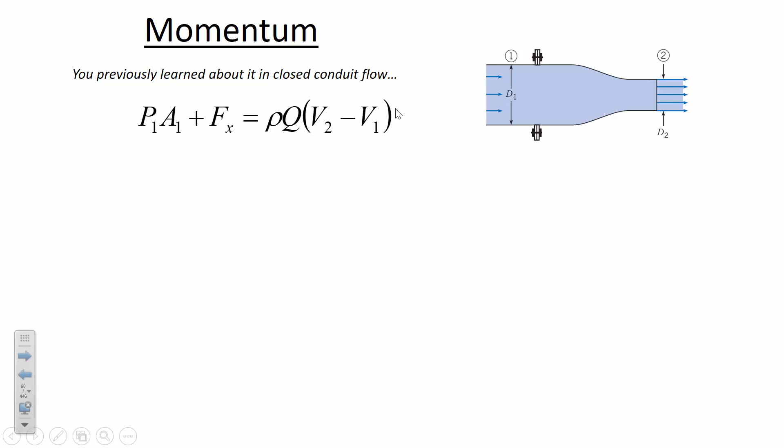So this is the momentum equation you've already used in the past, but momentum principles can also apply in open channel flow. We apply them when there's a hydraulic jump, because although we can use energy principles to predict a difference in depth when there are relatively gradual transitions, like flow over a step or flow when the channel gets narrower or wider, we can use energy for that.

We can't use energy principles to predict the downstream depth in a hydraulic jump because, as you'll see, there's so much energy loss in the hydraulic jump. So we have to have some other way of approaching things.

So this is the momentum function. What it's saying is that when you compare an upstream and a downstream location where the depth is changing, even when the energy isn't conserved, the momentum is conserved. The momentum function says there is both a dynamic component and a hydrostatic component to what's being conserved.

At location 1, if you take the flow rate through this channel and the gravitational acceleration constant, the cross-sectional area - this first term, if multiplied by gamma, would give you a force, as would the depth to the centroid. That's the distance from the top of the water down to the centroid, multiplied by the cross-sectional area. So if you take this second term of the momentum function and multiply it by the unit weight, that gives you the hydrostatic force component at 1.

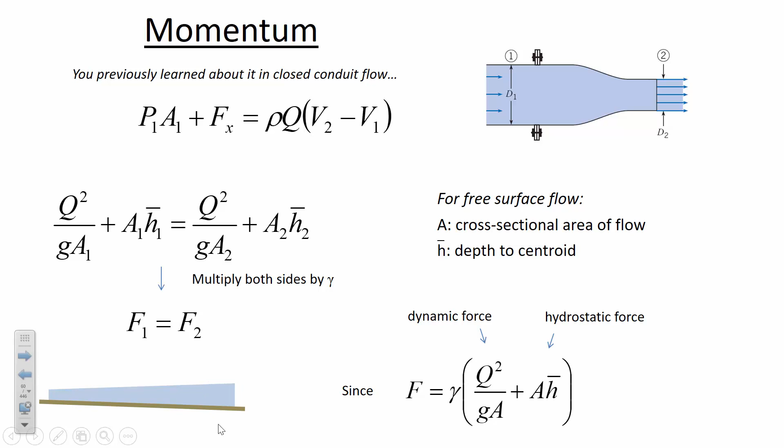By the way, calculating the depth to the centroid, if it's a rectangular channel, it's only half the distance down. But we'll go through an example where we calculate the depth to the centroid for a trapezoidal channel, because it's a little bit different. So momentum is just a law of conservation that we're going to use to predict what would be the depth downstream when there is a pretty radical transition in the flow regime.

That radical transition is called rapidly varying flow. I'm going to show you a couple of instances that will cause a rapid variation in flow, and what's varying is the flow depth and also the flow regime.

Upstream of this transition, conditions are supercritical, so the depth is less than the critical depth before the transition. This diagram shows that the slope before the change was greater than the critical slope, and because it was really steep, that caused supercritical flow - the depth y naught 1 was less than the critical depth. But then the slope got less steep, and after this transition, the slope is less than critical, so we call that a mild slope.

Any slope that's going to cause subcritical flow is a mild slope, so the mild slope causes the depth to be greater than the critical depth. This dashed line represents the critical depth, and since it's greater than the critical depth, that means it's going to be subcritical flow.

Anytime you have a transition between supercritical and subcritical flow, going from super to sub, it can't do it gradually - it has to be a really dynamic, rapid change in the depth. That's what a hydraulic jump is. Here they're trying to depict the rollers and the foam and the vigorous turbulent mixing you'd see in an actual hydraulic jump. So a change in slope is something that can cause rapidly varying flow.

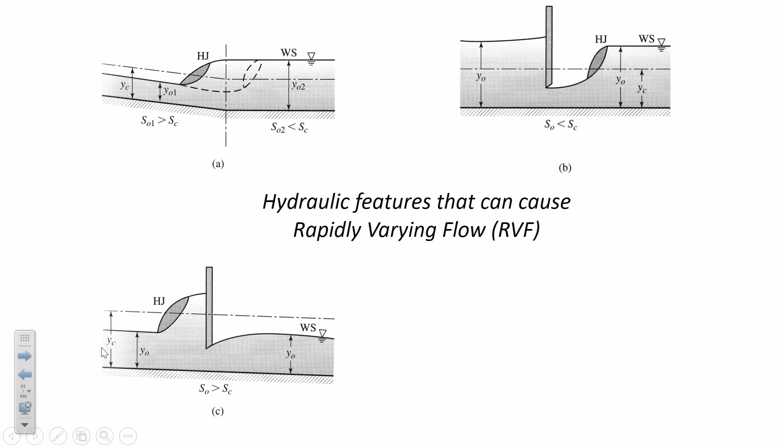It's not downstream of the gate that you see the jump, but upstream of the gate that you see the jump. The reason is that when this gate was lowered into place, it caused pooling on the upstream side of the gate, and the water pooled above the critical depth. So further upstream, where we had supercritical flow conditions, the supercritical flow is coming along, and suddenly there's a downstream depth that's greater than the critical depth. So you have super going to subcritical, and anytime you have that transition, it has to go through a hydraulic jump to match the two.

RVF stands for rapidly varying flow. What do you think GVF stands for? Gradually, right. So rapidly varying flow is the hydraulic jump itself.

It's this dark gray shaded area where the depth is quickly transitioning from supercritical to subcritical. That's rapid. Gradually varying flow is just what it sounds like - it's where the depth is changing much more slowly. Instead of, like a hydraulic jump which may have a length of a couple of meters, gradually varying flow may have a length of several thousand meters, potentially.

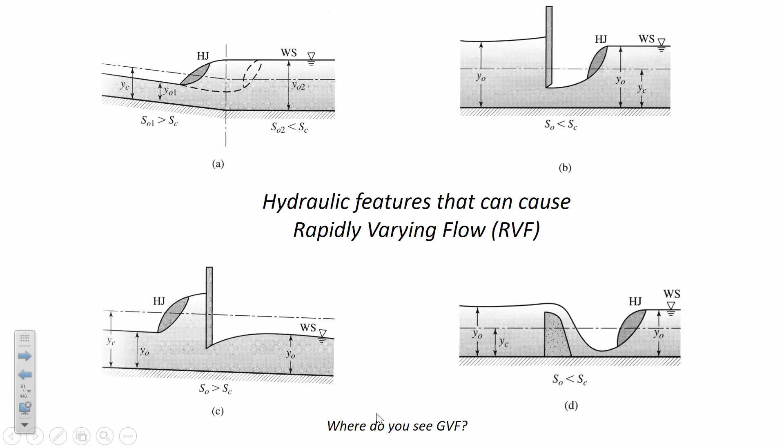Remember, energy isn't conserved, but momentum is. Now this may look like a specific energy diagram, but it's not. It's just coincidental that it has that same curved shape. There are differences we'll take a look at.

On the horizontal axis is the momentum function. On the vertical axis is the depth.

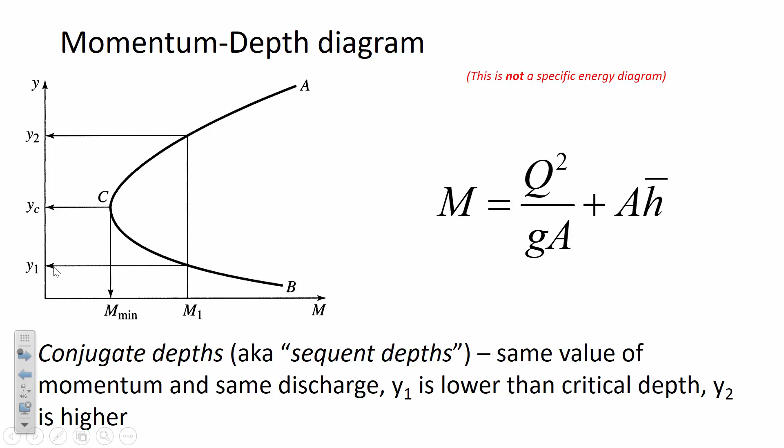So the way to use this diagram once you create it: you'll have some known depth before the hydraulic jump, a known depth y1. If you go over to the momentum depth diagram and then up to the same depth that has the same amount of momentum, you can go over and find y2, the depth after the hydraulic jump. So you'll have the same momentum, the same flow rate, but two different depths with the same amount of momentum.

Just to illustrate the difference between a specific energy diagram and a momentum depth diagram, I'm going to create one in Excel. If you've got your computer, you're free to follow along, but you don't necessarily have to, because you're going to get this same experience for the homework assignment. It asks you to create a momentum depth diagram, so I'm going to show you how to do that.

What we're going to do is just take this given information. We're going to know the width of the channel, the amount of flow rate going through there, and various depths. So there's the flow rate in cubic meters per second, the width of the channel in meters, and we're going to have a whole lot of various depths.

H bar is the depth to the centroid, the distance from the top of the water to the center of area. The cross-sectional area is in meters squared, the velocity of the water as it flows, specific energy—just to illustrate the difference between the specific energy diagram and momentum depth diagram—and then the amount of momentum. The units on the momentum function are meters cubed.

Oh, that somehow got formatted along with the rest of it. Let me fix that... well, we'll fix that in a bit.

In the problem, it says the flow rate is 15 cubic meters per second. I'm going to make a bunch of these because I'm going to look at all the various combinations of depth that could give that same 15 cubic meters per second. So for 15 cubic meters per second, the channel width is always going to be 6.5 meters. That doesn't change, but what does change is we can have lots of different depths and corresponding velocities.

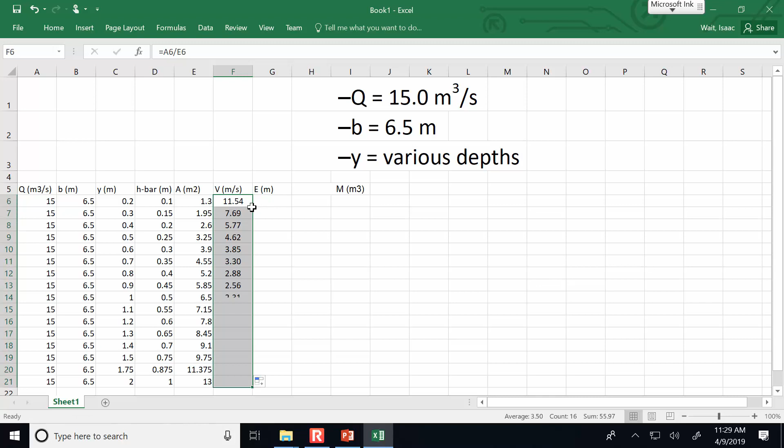Now the cross-sectional area is going to be the channel width times the depth of the flow, and that goes all the way through our variety of depths. The velocity, v, is Q divided by the area. So when we have a shallow depth, the water has to flow pretty quickly to get a certain flow rate through the channel, but when the depth increases, the velocity will decrease.

Let me write the equation for the specific energy. E is the depth plus the velocity head, v squared divided by 2g. So specific energy is the depth plus v squared divided by 2 divided by g, 9.81. Okay, so that is our specific energy.

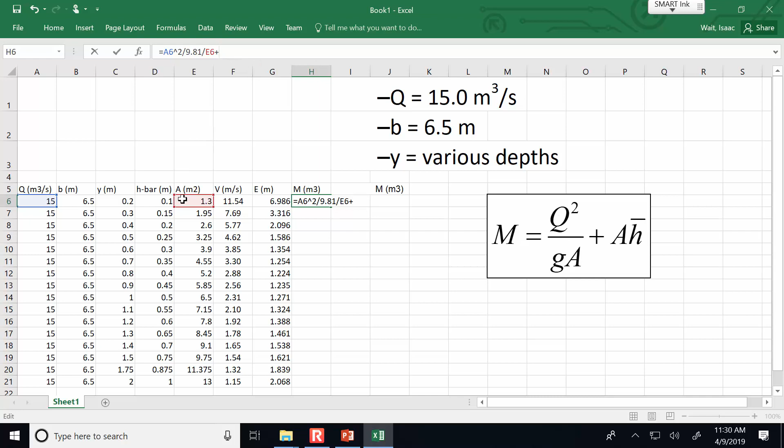And then the momentum function in terms of cubic meters, the function we're using there is this one. Let me paste it over so we can see it as we type it in. So it is q squared divided by g, 9.81, divided by a. That's the first term of the momentum function. And then we're adding the cross-sectional area times the depth of the centroid. So this is how much momentum there is for these certain flow conditions.

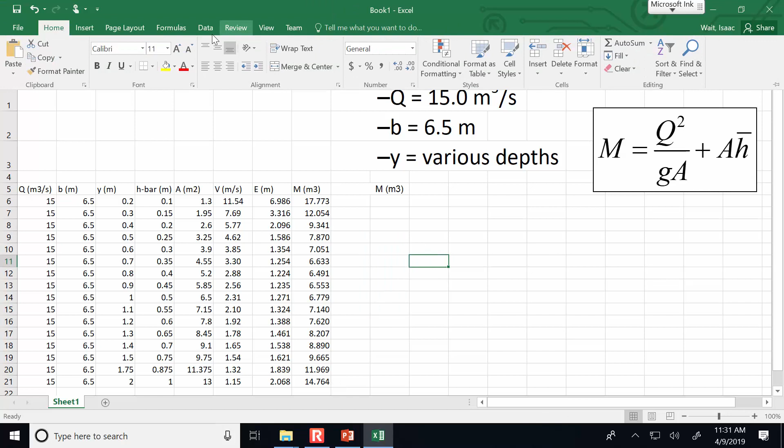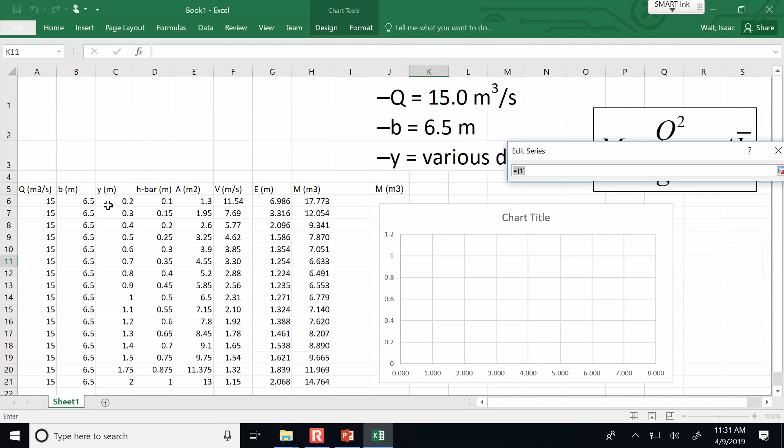And then if I just double-click, it'll apply that down through. Now let's do a quick diagram. We've already seen a specific energy diagram before, where we want to have specific energy on the x-axis as E, and then on the y-axis is depth. So this is the familiar shape of a specific energy diagram. Oh, did I cancel? That was the wrong thing. Select data, I'll have to do it again. X-axis is energy, and the y-axis is the depth. Okay, so this is a specific energy diagram.

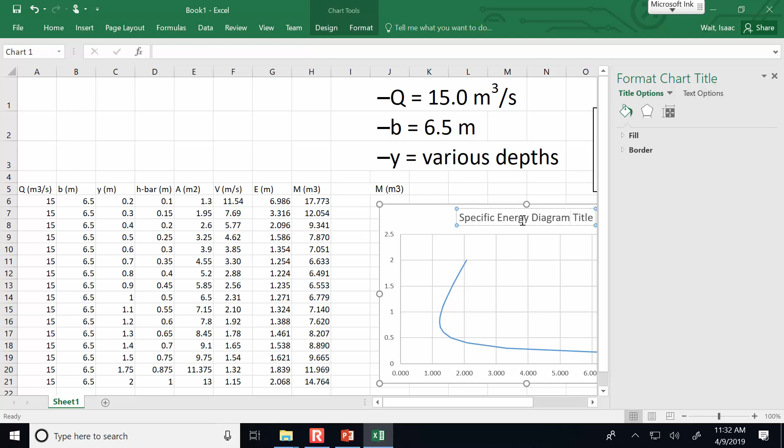And just to illustrate this, what I probably ought to do is put in a little bit more data. Let's see which point is showing that. That is where we've got the deeper depth. So let me go all the way up to 3.

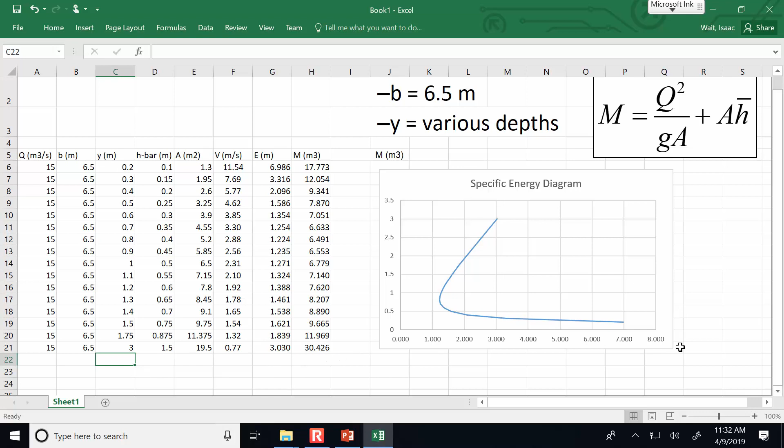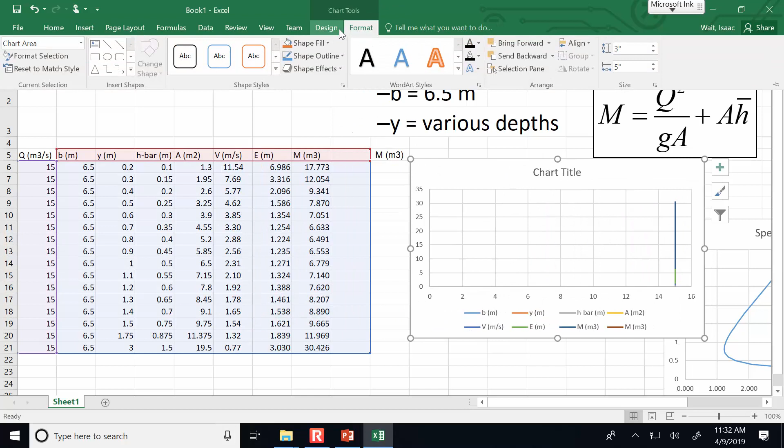Now in the case of the momentum depth diagram, I'll push this aside for a moment so I can create the momentum depth diagram. So I'm going to insert a new chart. Excel does a great job guessing what I want to graph. Wrong as usual, let's just delete all of that. All right, so what I want to have is on the x-axis the momentum function, and then on the y-axis depth.

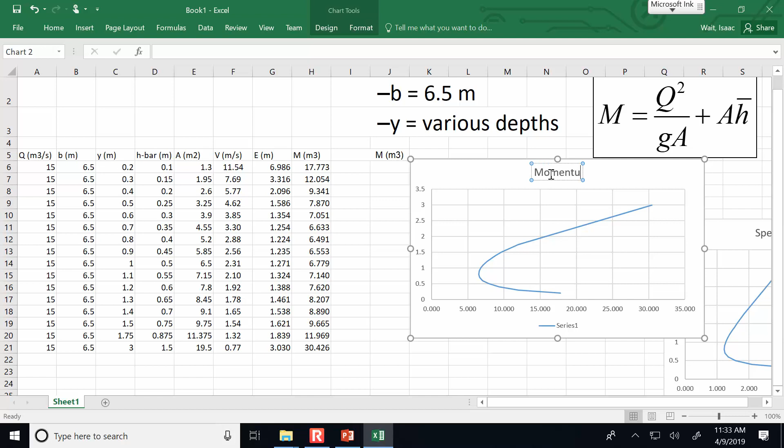All right, so this one is my momentum depth diagram. The momentum depth diagram is what you use for hydraulic jumps. And of course, it'll continue much further depending on what data I include here. It's maybe going a little too far, so let's make this one depth of 2. Okay, that looks pretty good. Maybe just 2.2.

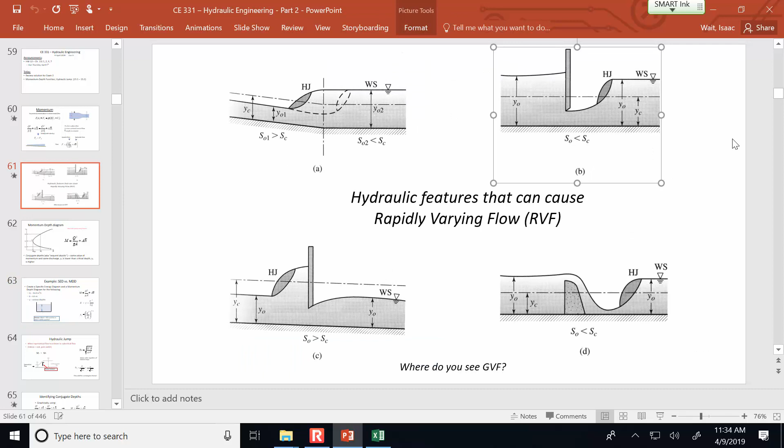All right, so the momentum depth diagram is used to predict what would be the new downstream depth after a hydraulic jump. The way that you'd use it: let's say you know, back to one of these sketches, for case B, what if the depth before the jump was 0.3 meters, and we had flow conditions of 15 cubic meters per second, with the width of the channel at 6.5. If 0.3 was the before depth, then you'd say, all right, I know that my momentum before the jump was about 12 cubic meters.

So then what you'd be doing is looking for the next point in the momentum depth diagram where you have that same amount of momentum. Here it is, approximately 12. And so that would tell you that the downstream depth after the hydraulic jump, if you started with 0.3, would finish with about 1.75. So that's the definition of a sequent depth. It's the depth that has the same amount of momentum.

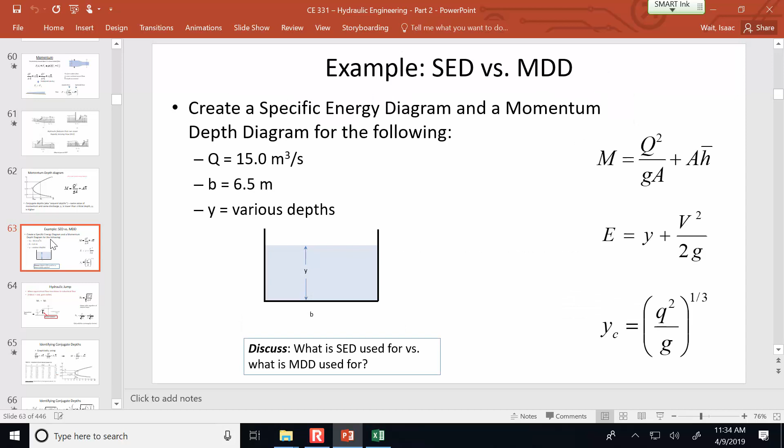So any questions about how to throw together a momentum depth diagram? Let me format this so it's a little more tidy, because I wouldn't want to show all those extra digits there. That would be, there we go, 0. Okay, and then we would probably want to put on some axis titles there as well. It's kind of in the way here.

I know you just randomly selected a range of depths. Is that a typical range? No, it's not typical, it's kind of an iterative process. You know, what if I'd started at 0.01 and done 0.02? If I'd started with these tiny little depths, it would have taken me a while before I actually saw anything. So it's just something you have to play around with.

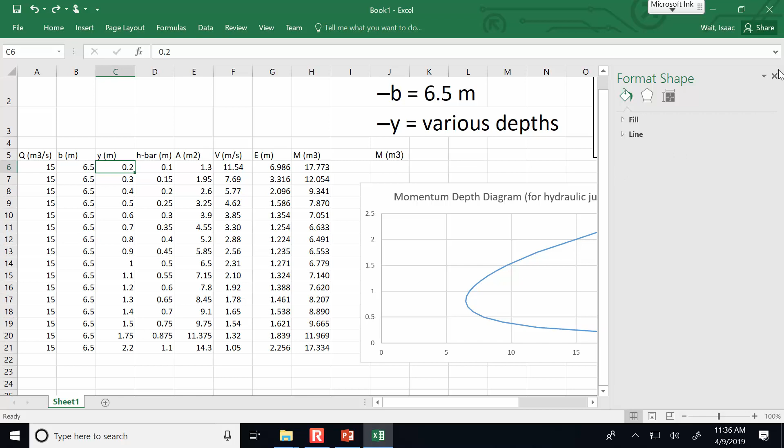There isn't any rule of thumb that you can always start with a given depth. It's just like a lot of things, trial and error. What you want to do, I guess, is calculate the critical depth. The furthest most to the left point, that's the critical depth. So calculate the critical depth and go a little bit below that and a little bit above that, and then at the very least you'll be able to see the point in the momentum depth diagram.

If you know what was your starting depth, then that would be maybe as low as it needs to go. You could go a little bit further just to make a pretty diagram, but that's a good question.

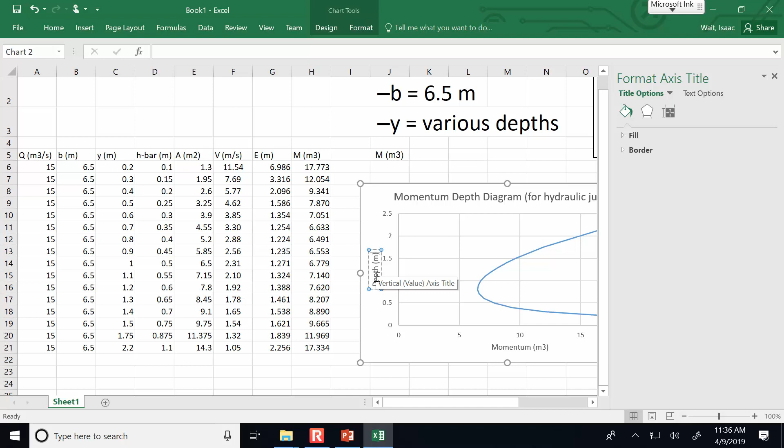Last thing, we've got to put on some axis titles. On the horizontal axis is momentum, with units in cubic meters, and on the vertical axis is depth in meters. Now we have a proper momentum depth diagram.

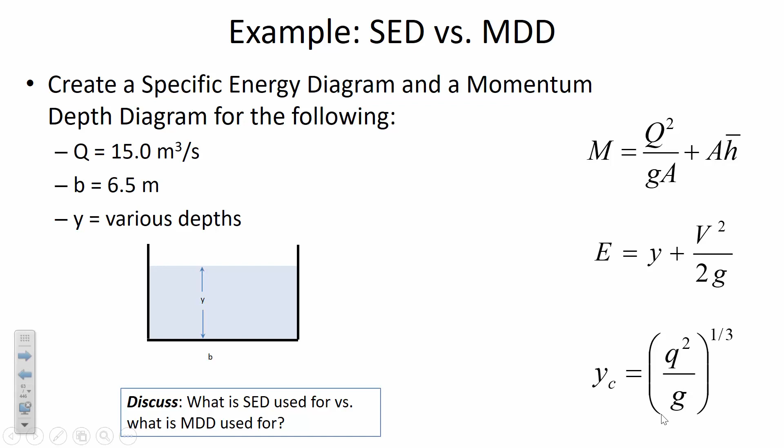You don't have to solve for the jump depth using Excel. There are direct equations that will allow you to calculate the downstream depth in a hydraulic jump. The principle here is that momentum is conserved through the hydraulic jump. Remember how we've previously defined the Froude number — even if you have a trapezoidal channel, this top formula will work.

We'll have to skip over the videos today because we've got some extra ground to cover. They weren't that good anyway. If they were good ones, we would have watched them.

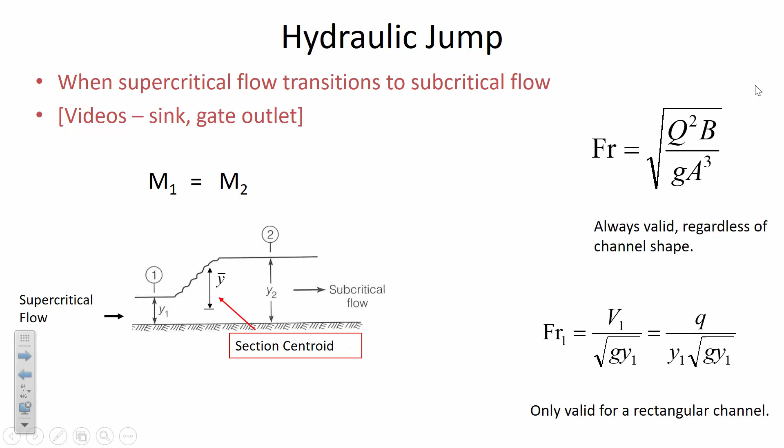The Froude number, if you have a rectangular channel, is a little bit easier to calculate because you can determine the flow per unit width, lowercase q. But just remember, if you've got the Froude number, you can graphically identify the conjugate depth — that's just another name for the sequent depth, meaning the depth after a hydraulic jump.

I guided you through that process: you start with a whole range of flow depths and find what is the momentum equivalent for that range of flow depths. Then if you have a starting depth, you go and find the same amount of momentum, but the depth that is the subcritical version of that same amount of momentum. Below the critical depth is supercritical depths, and above the critical depth is subcritical depths. So Y2 is subcritical, and in this case, if we started with an original depth of 0.6, that means we're looking for a momentum of about 7.05.

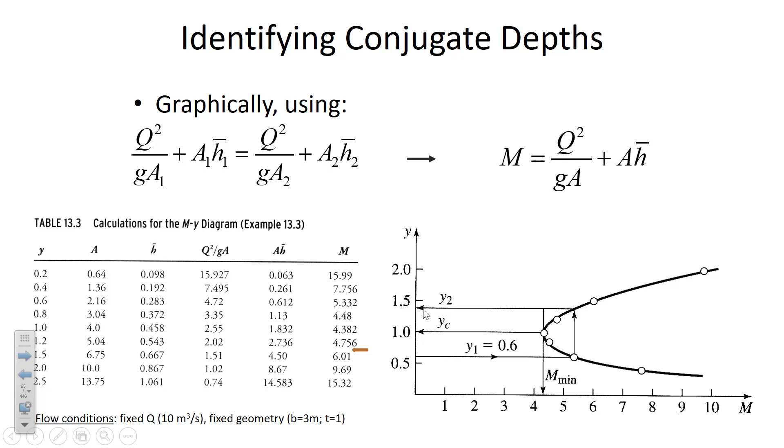So that would be between 1.2 and 1.5. Doing it graphically, it looks like it's around 1.4 for the downstream depth. This Belanger momentum equation is a way to solve it without using the graphical approach.

It relies on the upstream Froude number. If you calculate the Froude number at 1, you can find Y2, which is the depth after the hydraulic jump. Y1 is the depth upstream of the jump, and Y2 is the depth downstream.

If you go through different textbooks or reference manuals like the one for the FE, you'll find a variety of ways of expressing this Belanger momentum equation. Here you can write it as a function of the Froude number, sometimes as a ratio of the critical depth to the upstream depth. Notice that this term is to the third power, whereas with the Froude number it's just squared. Both will give you the same answer.

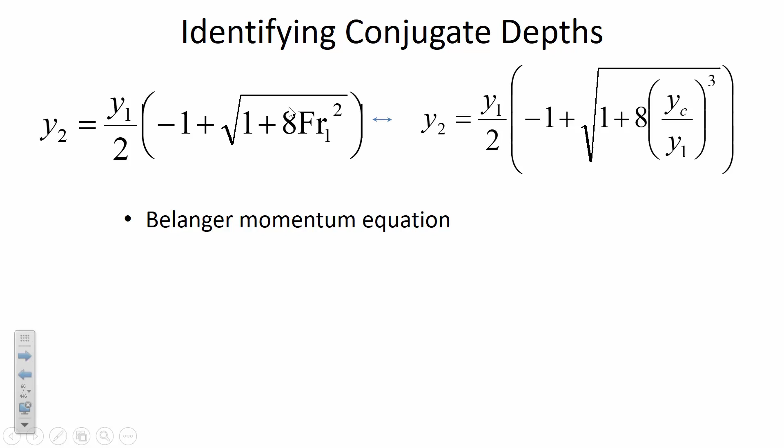There are some assumptions here, and when we go into the lab, I hope we'll have time on Thursday to play around with the flume and see more about the hydraulic jump. You got a sneak peek of it last time we were in the lab — you saw that jump going upstream as the water encountered the broad-crested weir. We'll set up a stable jump using an underflow gate in the flume, and we'll see that we can use this Belanger momentum equation to predict the downstream jump, and it's kind of okay, but not exactly right.

The uniform velocity distribution assumption says that if we look at the side view of the channel, here's the bottom, here's the water. In reality, what we know about velocity distribution is that the water velocity is slow at the bottom and speeds up towards the top because of the no-slip condition and fluid viscosity. Another way to think of it is because of frictional losses - the water encountering the bottom of the channel resists the movement of water in the opposite direction of its flow. So the reality is we don't have a uniform distribution, but the Belanger momentum equation says the math is a lot easier if we assume the velocity is the same everywhere, regardless of depth.

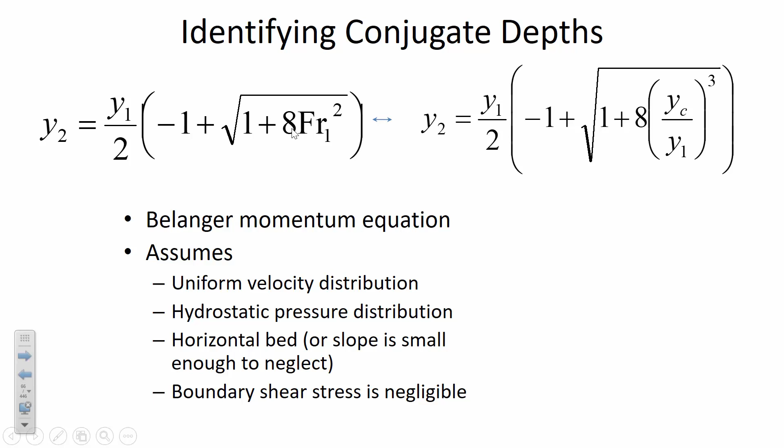In other words, the water is slipping over that surface without any resistance, because this Belanger momentum equation itself isn't accounting for energy loss. There is energy loss in a hydraulic jump, and we have a separate equation that allows us to estimate how much energy loss there is. But this isn't accounting for energy loss just from interacting with the bottom of the channel - there is some energy loss having to do with turbulence, and we guesstimate that based on the Froude number. I think that's the first time I've used the phrase guesstimate in any of my classes, so hopefully we won't have to say that too often. We'd like our equations to be more precise than guesstimate.

All right, like I mentioned, we can approximate the energy loss that happens when there's a hydraulic jump, and this is the approach we use to do it - we just take into account the difference in the downstream and upstream depths. So just to get an idea of the magnitude of how much energy is lost in a hydraulic jump, we'll do a calculation in a minute. But actually, hydraulic jumps are sometimes forced because it can be a useful way of dissipating energy.

Remember I told you about the V-notch weir when we were down in the lab? How come V-notch weirs are used in environmental engineering? Do you remember what was the attraction of that V-notch weir? Oh that's right, yeah, the velocity exits the tank very gradually.

And if you've got a tank where the whole point is settling particles, you don't want a big outflow velocity because it'll interfere with the particle settling. So sometimes low velocities are important - that example with the settling tank is one. Another time low velocities are important is in channels that are naturally lined. If you have gravel and soil in a river, you don't want a huge rush of water coming through and scouring all that sediment away.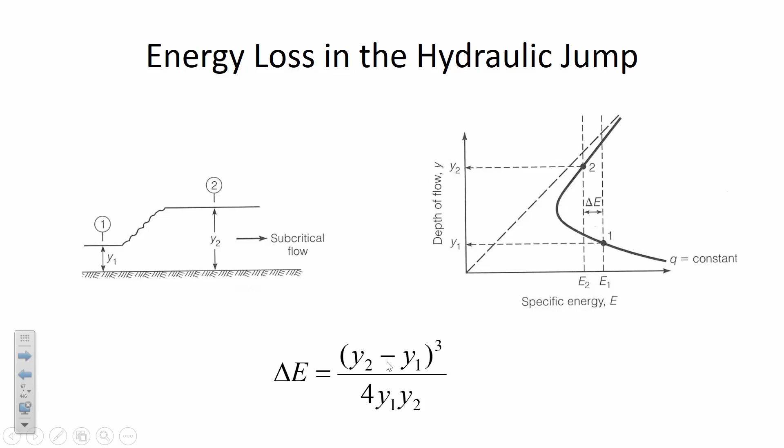Anytime water is going down the face of a dam, remember it's supercritical and has all this energy as it exits a spillway. One of the ways to dissipate that energy is by forcing a hydraulic jump in a location where you've specifically created some armoring and cladding of the channel. Oftentimes they'll put big energy dissipation blocks in the channel downstream of the face of a dam just to help absorb some of the momentum, and by forcing the hydraulic jump in a certain location, they avoid the velocity and energy being too high downstream, just to prevent erosion and scour of the channel.

Okay, so here's an example of a hydraulic jump. You are going to solve for the downstream depth using the Belanger momentum equation. While you're doing that, I'm going to set this up on Excel, and we're going to see if we get the same answer for the downstream depth. So this is a rectangular channel - that makes it easy.

We want to know what's the downstream depth Y2, and then how much energy is being lost. The units here, delta E, are going to be meters. Where it's asking for the fraction of the initial energy that's lost, that's really asking what percent of the energy at point 1 is lost because of the hydraulic jump. All right, you start solving with Belanger, I'll start solving with Excel.

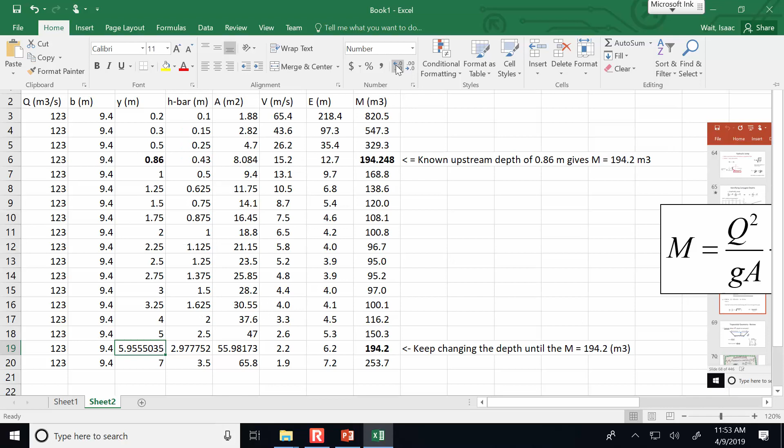What I can do is use a what-if analysis or just manual iteration. So I'm going to do data, what-if analysis, goal seek, and my goal is for this cell to be equal to 194.248 by changing the depth. And let's see what it comes up with. All right, it's saying 5.96 meters. I see some nodding heads agreeing with that. Let me pull up the hand calculations that I have for this one and see if we're all on the same page for the downstream depth.

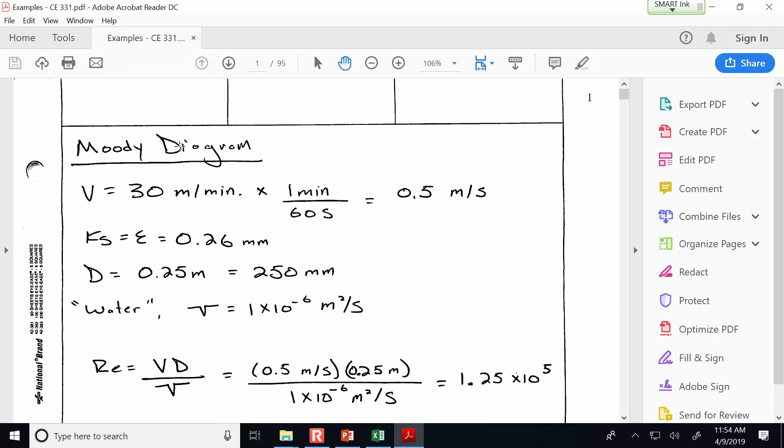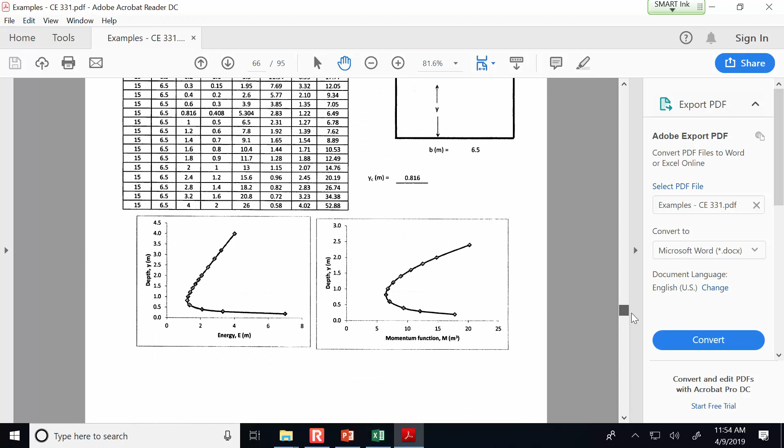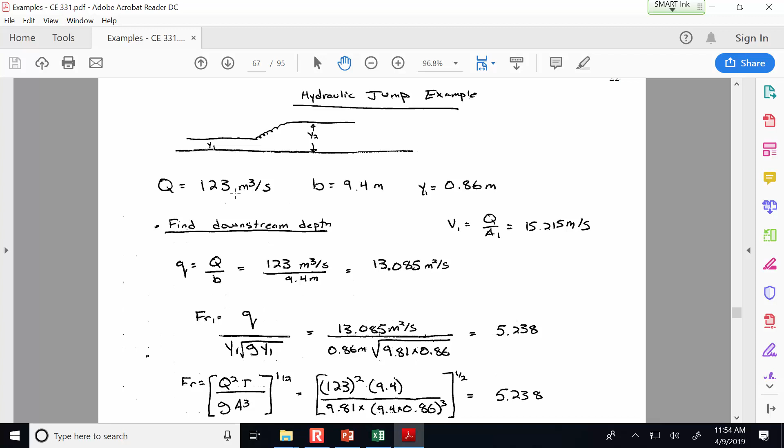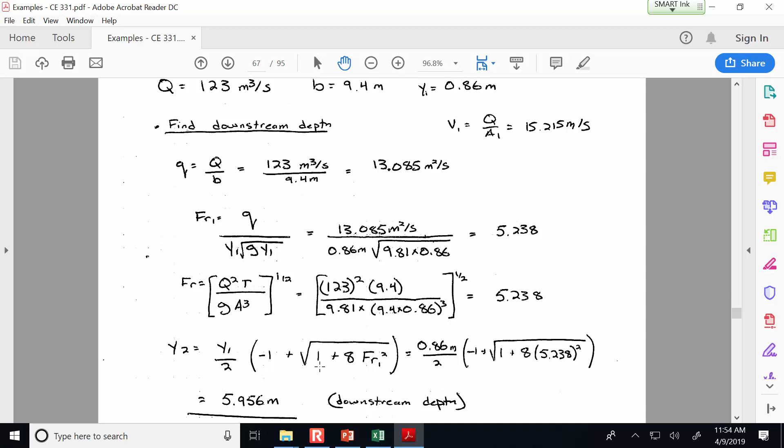All right, so we have a rectangular channel, 123 cubic meters per second. I found the flow per unit width and then the Froude number from that. Or you can get the Froude number the other way, the full way. Put it in the Belanger momentum equation. 5.956 meters would be our downstream depth. Any questions how to apply that equation?

No? What does it assume? Remind me, why isn't it ever going to be accurate? Uniform velocity distribution, that's kind of the real weak point. There are other approaches that don't make that same assumption, but it's not the sort of thing where you can just, in a tenth of a page, solve for the downstream depth.

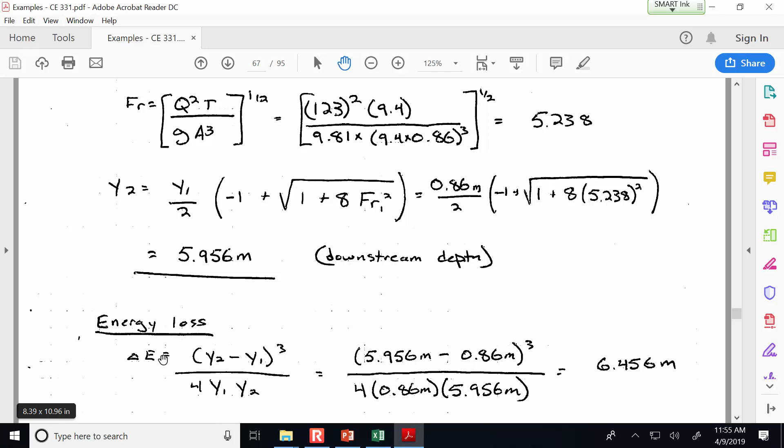I mean, this is usually good enough for the quickest approximation. Now, the other thing it was asking in the example is what is the fraction of the initial energy that is lost through the jump? So how effective is this hydraulic jump at dissipating energy? Okay, so the energy loss, the delta E, is going to be about 6.45 meters. And the initial energy, if you looked at the flow conditions before the hydraulic jump, the initial energy was going to be the depth and the velocity head.

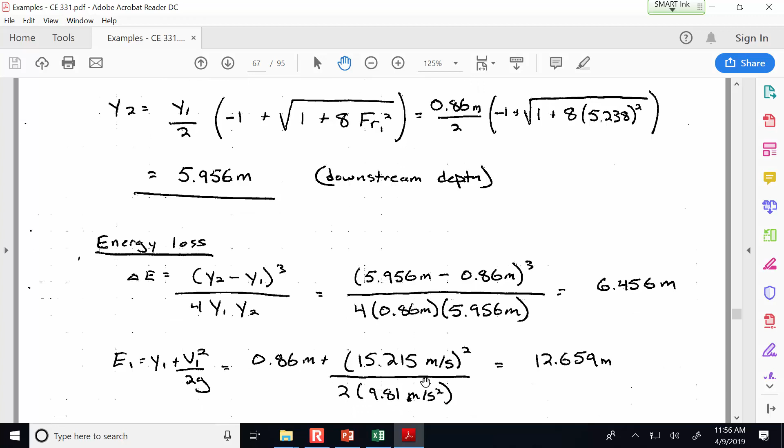And it was really moving fast in that initial shallow depth, had a velocity of 15 meters per second. And that's getting so fast that I could peel the paint off the walls. It's really moving fast. So 12 meters of energy, and so the 6.456 meters, the fraction of initial energy that's lost, relative to the initial energy, is 0.51. That means through the hydraulic jump, we're dissipating 51% of the energy that was there initially.

So the other way to calculate that would just be to find what is E2. E2 would be the depth plus the corresponding velocity head. And so that's effectively what this delta E equation is doing, is finding out how much of the energy that was there initially is lost through the jump. Any questions? I see people copying, and that's good. I'll leave this up for a second.

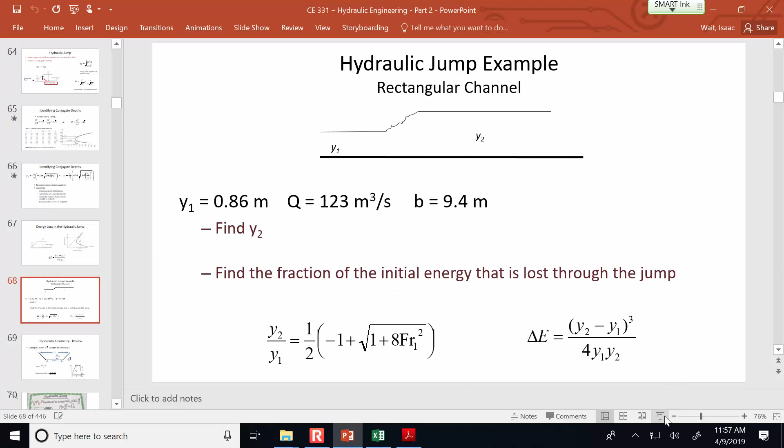All right, the h-bar in the two examples I've done so far has just been half the depth. That's not the case if you've got a trapezoidal channel, though. It's a little bit trickier to find the depth of the centroid if you've got a trapezoidal channel, because you have the effect of these side triangles. And so the depth to the centroid for the side triangle is one-third of the distance down from the surface, and there's kind of a spatially weighted average that you have to conduct.

What I've got here on the screen is a formula I found for if we have a trapezoidal shape, how to find the distance up from the bottom. And so therefore, if you can find the distance up from the bottom, then the distance down from the top would just be y minus that distance up to the centroid.

So using this as an illustration, what if we had a depth of 1 meter, the bottom of the channel is 3 meters in width, and we have 1-to-1 side slopes. You're going to need to do this on the homework, so let me show you on the whiteboard how we could calculate the h-bar.

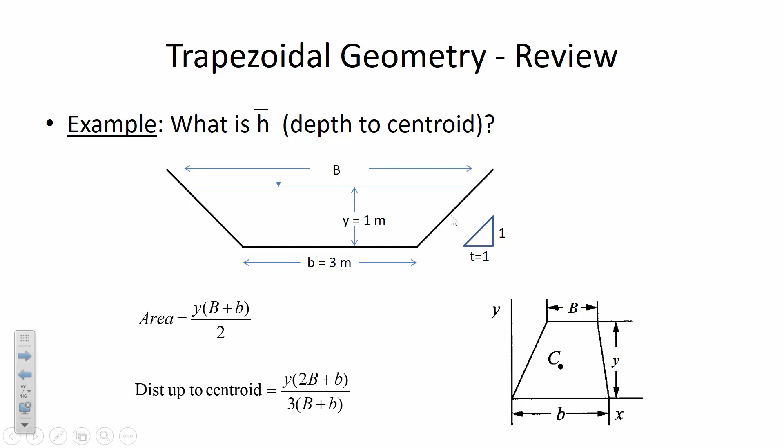So how far from the water surface down to that centroid? So 1 minus 0.5417, it would be at a depth of 0.4583 meters. So you can use that same approach in the homework to calculate the depth of the centroid.

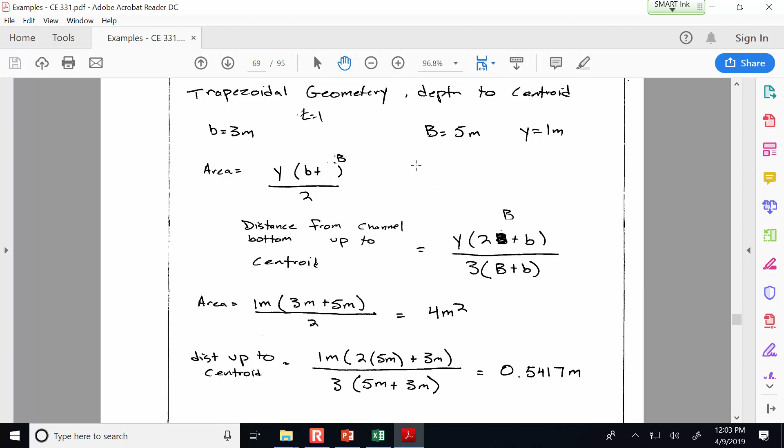Now, what we're going to see when we go to the lab is that the hydraulic jump, the location of it, depends on how steep we make the flume. One end of that flume has a crank on it, so you can raise and lower the upstream end of the flume so that it can be flat, or sloped, or you can actually make it adverse so that the upstream end is lower than the downstream end. So by changing the slope of the flume, what we're able to do is adjust the normal depth that would occur.

If there were no obstructions, no underflow gate, and if we weren't forcing a hydraulic jump, you could just have the normal depth going through that channel. Remember, normal depth is calculated with Manning's equation, assuming steady, uniform flow.

Now, the hydraulic jump can be moved around by how steep you make the flume, because the hydraulic jump is matching up with some downstream depth. This part about the location of the hydraulic jump is an important concept that maybe isn't going to make immediate sense. It's something that would benefit from reading through the book and solidifying in your mind the logic of why it's doing a certain thing.

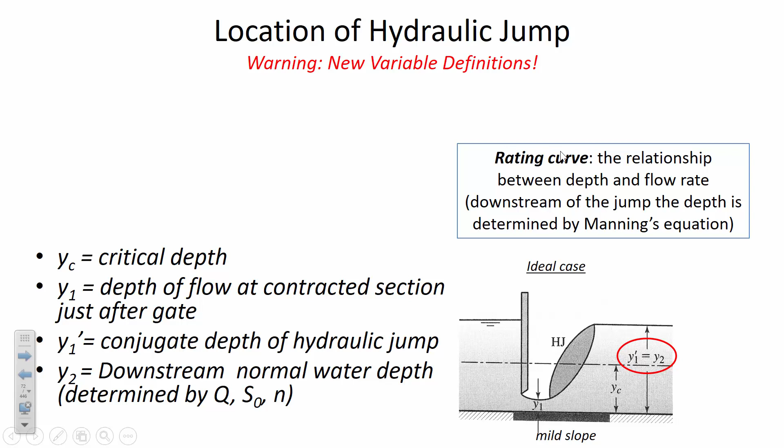Tailwater just means the depth of the water downstream of the thing we're focusing on. So we're focusing on this gate, the hydraulic jump, and the tailwater - the channel downstream - whose flow behavior is governed by Manning's equation. We can kind of control this hydraulic jump by opening and closing the gate.

If we close this gate a little bit more, that's going to change Y1, making it even smaller. But if we open the gate a little bit, that would make Y1 bigger. So the downstream depth, Y prime 1 - new variable definition here - is the conjugate depth, meaning after the hydraulic jump, the one that the Belanger momentum equation predicts is going to occur after it goes through the hydraulic jump.

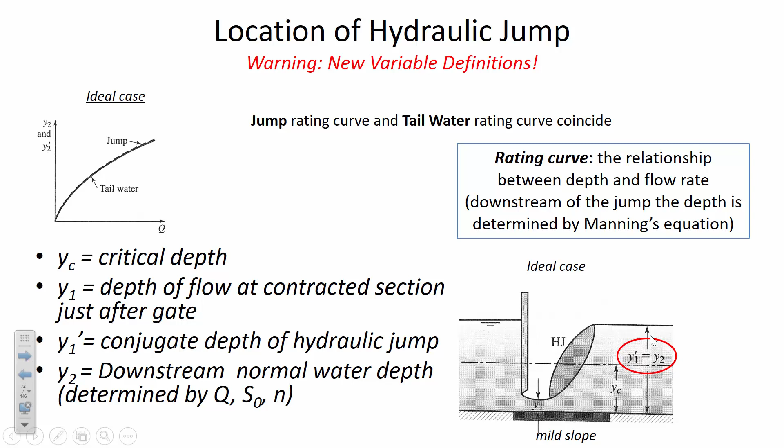So to understand what makes this ideal, maybe it'll help to see a non-ideal case. So if it happens that the tailwater depth in the channel downstream is less than the conjugate depth of the hydraulic jump - if you do Belanger's momentum equation, here's your y1, which is governed by how wide open the gate is.

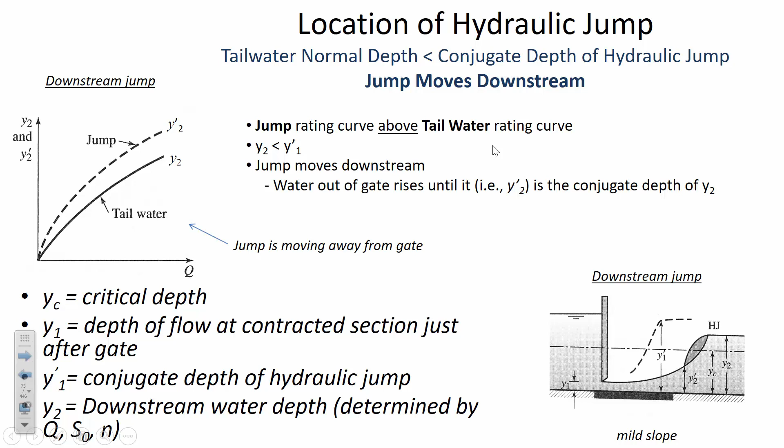So this is why the jump moves downstream. In other words, it couldn't go through the jump that would have been predicted because the water just wasn't there for it to happen. The other case is if the tailwater rating curve is above the rating curve for the jump, then it causes the jump to approach the gate and actually flood the hydraulic jump.

So the water downstream, look at for a certain flow rate, for a certain Q, what this is saying is that you need to have a pretty deep depth downstream for a certain flow rate. The depth has to be higher for a certain flow rate than the hydraulic jump needs it to be. So this channel downstream has, you can think of it this way, a poor conveyance capacity. Maybe it's a really rough channel or the slope is too mild, but for whatever reason, the water isn't moving out of the way very well. And so there's so much water pooling and collecting downstream that it actually submerges the hydraulic jump.

You won't see the hydraulic jump. It'll still be there, it's just that it won't be visible because it will be drowned. So we'll force that same case when we're down in the lab by drowning the hydraulic jump by changing the elevation of the flume.

Yes? For your graphic, you have y2 and y prime. Should that be 1, or because it's talking about y2 being greater than y? You're talking about here? Yeah, so there. Okay, the prime is just always talking about what would be the depth after the jump.

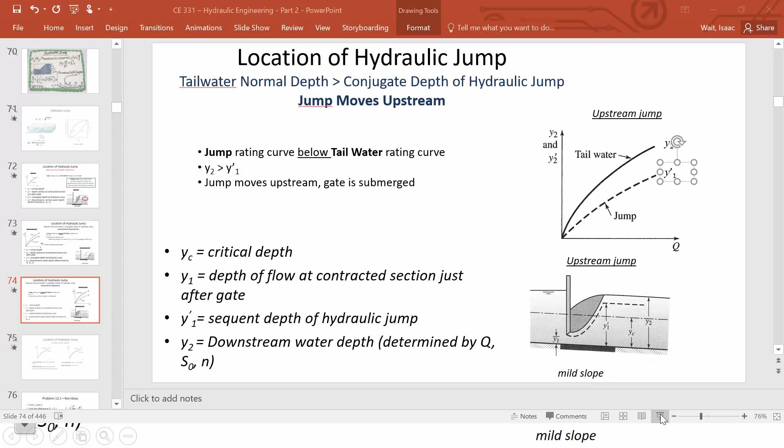All right, there's one more tip that I need to give you for problem 13.1, and what sometimes throws people off on this problem is they ask you how heavy some concrete blocks would have to be. These concrete blocks are inside a channel where there's a hydraulic jump occurring, and they give you a coefficient of friction, how easily the blocks would slide along the bottom of the channel.

In that problem, they tell you the depth before the hydraulic jump and the depth after the hydraulic jump. So what you need to do is calculate the force acting on the front side and the back side of the block. Find F1 and F2, and then the difference in force between the two. Then the weight that's required would be that force differential divided by the coefficient of friction.

In other words, the coefficient of friction is just the ratio of the force differential and the weight of the blocks. So the blocks are going to have to weigh more than the difference in forces because the surface is a little bit slippery. I think you'll see what I mean. That's the formula you should use.